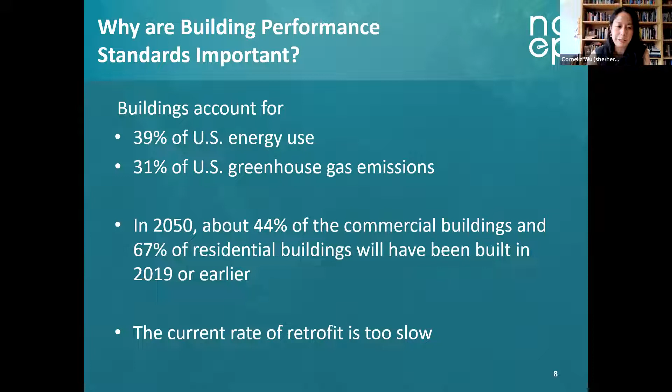Energy codes apply to new buildings and major renovations. They are based on the International Energy Conservation Code and/or ANSI/ASHRAE IES 90.1. Energy codes are one of many building codes, such as fire codes, structural codes, plumbing, and electrical codes.

Energy codes are set by each state, and while typically based on the International Energy Conservation Code, the model code year can vary. There are three major components: lighting, HVAC or mechanical, and envelope.

In contrast, building performance standards are relatively new and they apply to existing buildings, usually those that exceed a certain square footage. They are policies that require building owners to meet city or state mandated targets by improving the performance of their building, which can include energy use, water use, and emissions within the timeline specified, usually a series of milestones that need to be met over the years.

For instance, a compliance cycle might be every 5 years. Many buildings, as you know, combust fossil fuels on site for heat and hot water purposes. Building performance standards can encourage better performing buildings without necessarily stipulating the exact path.

Jurisdictions in the US where building performance standard legislation has been enacted include Washington, DC, New York City, Washington State, St. Louis, Missouri, and Reno, Nevada.

Energy codes and building performance standards are often developed independently of each other, and this is the crux of our session today. This is because while the energy code is typically based on the IECC, building performance standards are developed by each jurisdiction based on different interpretations of how benchmarking should be achieved and other variations.

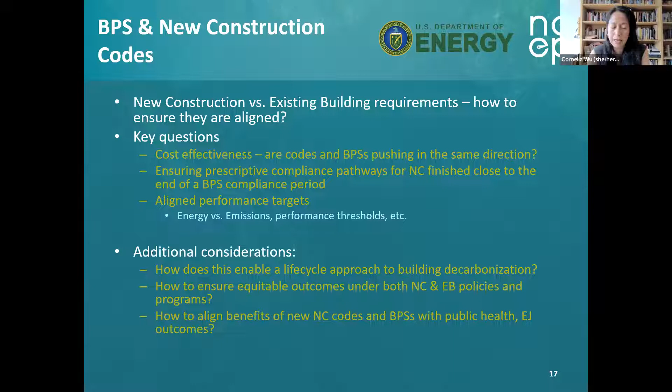Greetings, Cornelia. Thanks. Nice to see everyone. Thank you for joining us. Having us out. We're just so happy to have you here with us, because DC really is at the forefront with building performance standards. Thank you.

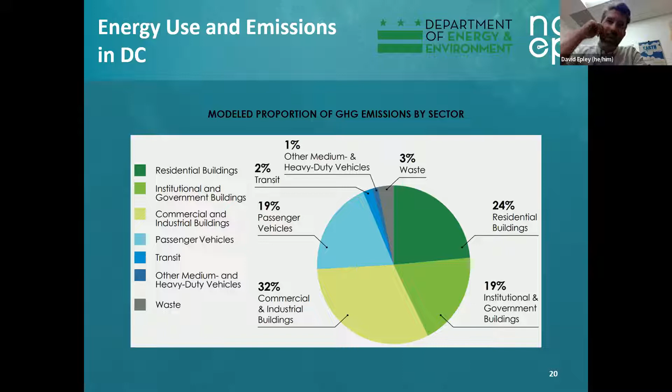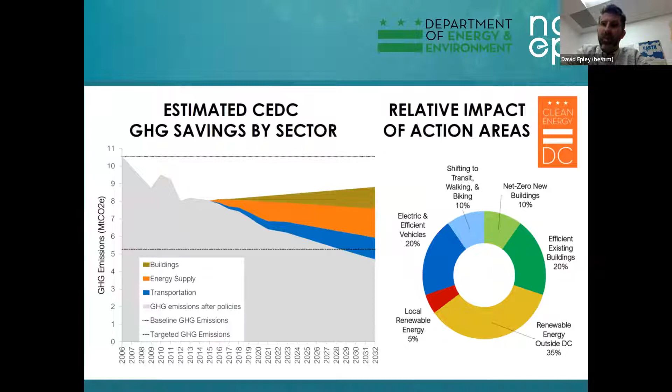And so we take our building energy policies and programs and enforcement very seriously. Next slide. Give a few more graphs here. On the left, you'll see the GHG emissions trajectories, out of our Clean Energy DC plan, which is online, a comprehensive energy plan. The tan, brown, gold color is our buildings, represented on the circular chart by our net zero energy new building strategy, and then our existing building strategy, which is the building energy performance standards.

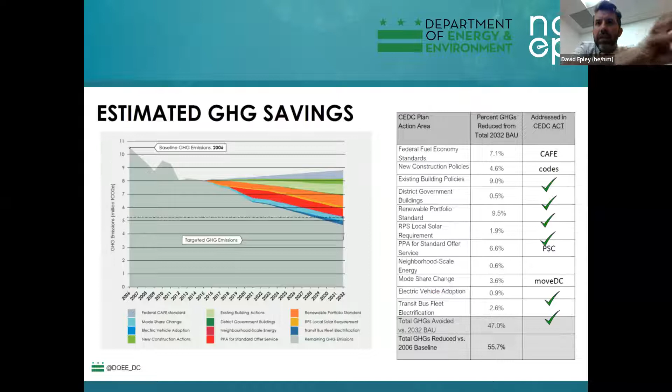Next slide. To break this down further, and by the way I'm sure NEEP will send out these slides so you can dig into these more. This is going out to 2032. As it progresses, the impact of net zero energy codes and energy efficient codes starts to have a bigger impact as we move forward. On the chart on the left, by 2032, it's about 4.6% of our GHG reductions over the 2032 business-as-usual case for new construction policies, i.e. net zero energy codes. And the existing building policies, our BEPS, is 9% at that point.

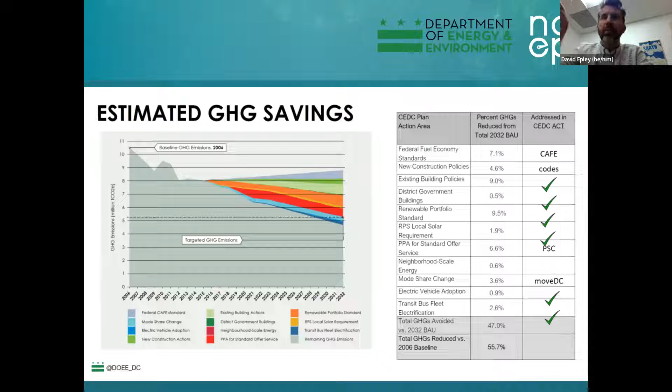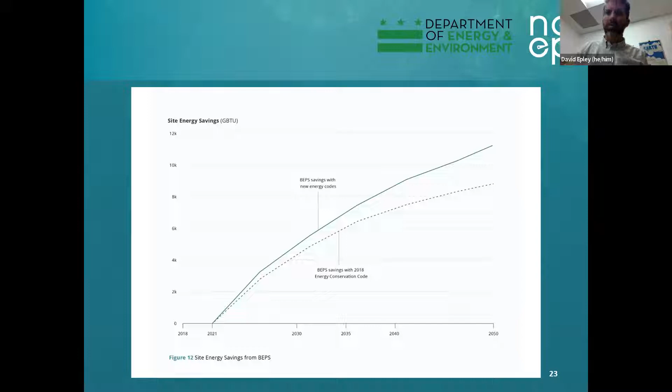But if we move with our net zero energy codes, what happens, and we'll talk about why in a minute, is that it accelerates the impact of BEPS. For each building type, we're setting the building energy performance standards based on the median performance, and buildings that are lower than that have to go up. So if you push up the performance of every new building coming online, it moves the whole pack up and changes the median, and then accelerates and builds off of each other going forward. So it's very important to have both these things, and we would not be able to reach our carbon goals without this BEPS and our net zero energy code. So next slide.

Okay, so here we have BEPS cycles, as I mentioned. The way it works in DC, and I guess in New York too and other places, is that BEPS are set for us. We have a 5-year period, and multiple cycles over time, and as we go up, the energy performance continues to become enhanced. So you complete the first cycle, reshuffle the deck, reset the BEPS standards, and folks below the standards have another 5 years to come above, and it keeps going on. The code starts to accelerate this as you bring on more efficient buildings into the fold and into the deck.

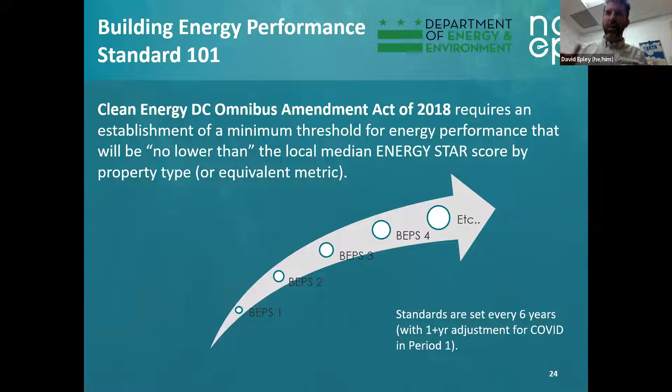Next slide. One thing I'll mention too is over time our BEPS starts to step down, over the cycles I was just pointing out. So right now we're at 50,000 square feet and greater for private buildings. DC-owned, or instrumentality-owned buildings, are at 10,000 square feet. So that covers a lot of ground. In our second cycle, we're going to go down to 25,000 square feet, and in BEPS 3, it's going to be down to 10,000. So this changes over time too. Of course, the codes affect all construction and all buildings.

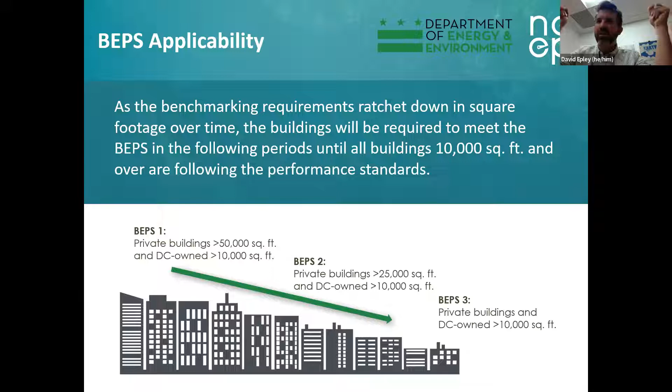Harmonizing these two things, as I mentioned, they accelerate each other. Without them, we wouldn't be able to hit our 2050 goals.

One thing we've been thinking about a lot is interagency coordination on policy and enforcement. How do the policies in zero energy codes, or codes in general, as well as policies like how we invest in affordable housing, supplement the mandatory requirements in a qualified allocation plan? How do those all blend into each other to ensure that buildings coming online and built to the codes are able to comply with BEPS over time?

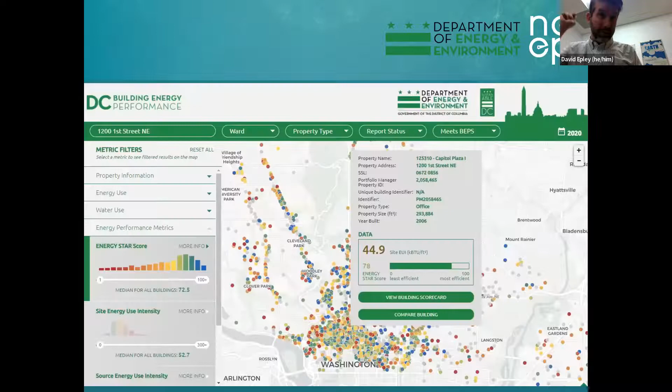There's an affordable housing retrofit accelerator we've stood up with the stimulus funds, the ARPA stimulus funds. That's really interesting and something worth checking out. Next slide.

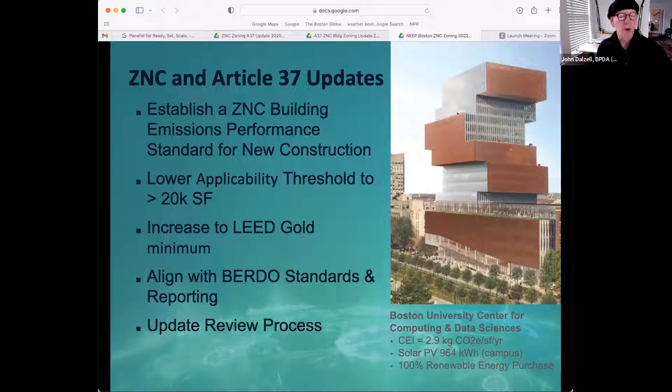As background, we have long had a green building standard. It's Article 37. Our current policy has set in motion a requirement that we update that zoning to include a zero net carbon building standard and lower our applicability threshold to 20,000 square feet, but also include updates to other aspects. It is a LEED-based standard, so we're elevating the minimum requirement to LEED Gold.

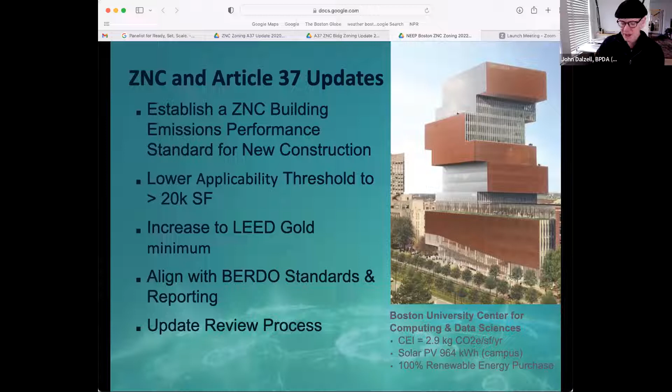Very importantly, we're aligning our BERDO standard and our zoning standards so that they interact and work with each other. This picks up on the point that a new building becomes an existing building the day it opens up. And then there are corresponding updates to our review processes.

What's great in Boston is that we already have an excellent industry at work creating high performance buildings. So we're really quite fortunate. We have some of the best engineers in the country, some of the best architects, but also some of the best developers. They've really taken to heart the city's carbon neutral 2050 goals and are already delivering buildings.

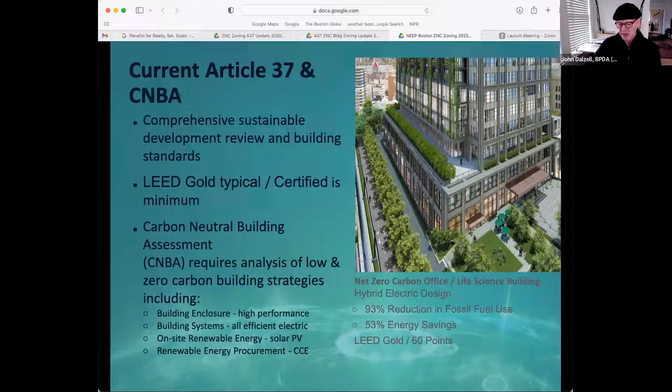Our approach here is to remain comprehensive in our sustainability strategies, but to add the zero net carbon aspects to it. So the framework we're establishing looks at low carbon buildings, making sure the building that gets built is still prioritizing on-site carbon reduction.

We also want to make sure buildings include on-site renewable energy, so we're talking about introducing a mandatory renewable energy standard for buildings, and then that they have a strategy for procuring renewable energies sufficient to offset the remainder of the carbon emissions from the buildings.

What was interesting in our process here was the introduction of embodied carbon and recognizing how important it is for our carbon neutral goals to also begin work on reducing embodied carbon. So more on that point to come.

Because this is city-sponsored development, it also includes a significant amount of affordable housing. LEED Platinum is part of it as well.

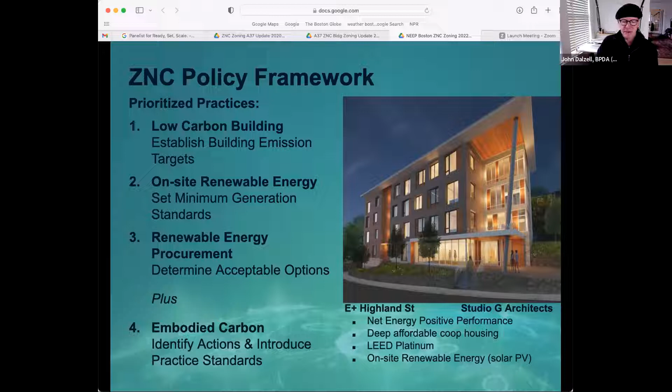BU, I showed this building earlier, but this building exemplifies our performance framework, our policy framework. First of all, it's starting out as a really good building. It's got a very low energy use intensity of 39.

We are, however, working on carbon emission reduction. So all of our policy is built around carbon emission intensity, and in this case, it's a really impressive figure of 2.9 kilograms per year.

BU is adding solar renewable energy to their campus buildings, but they already have in place renewable energy procurement policies and already purchase 100% of their electricity from renewable energy resources. So this is a net zero carbon building that is already topped out in steel and well on its way to being enclosed. Once again, very fortunate to have these anchor institutions showing us that zero net carbon buildings are possible today.

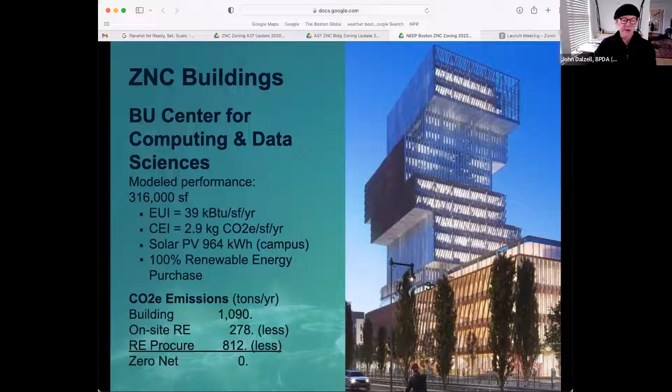The bottom here is just the simple carbon accounting: total emissions, on-site renewable, what's required for renewable procurement. The BU building here, by the way, is 100% electric. There is no fossil fuel use in the building.

We're seeing this across typologies. This is a large multifamily residential development project, actually a redevelopment of an existing affordable housing project. I think we've all heard great concerns about these sorts of policies affecting our affordable housing community, and I can tell you, this group is really at the forefront of practice.

Here we have a building with an EUI below 20, which I think 2 years ago I would have said is outrageous, not possible. Today I can tell you we are typically seeing buildings with EUIs below 20, multifamily residential buildings that is. The comparable carbon emission intensity of 1.48 is exemplary, with on-site renewable to offset as much as they can, and then once again the carbon calculations.

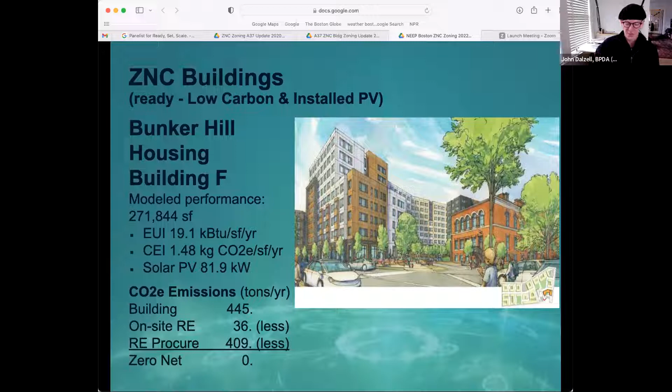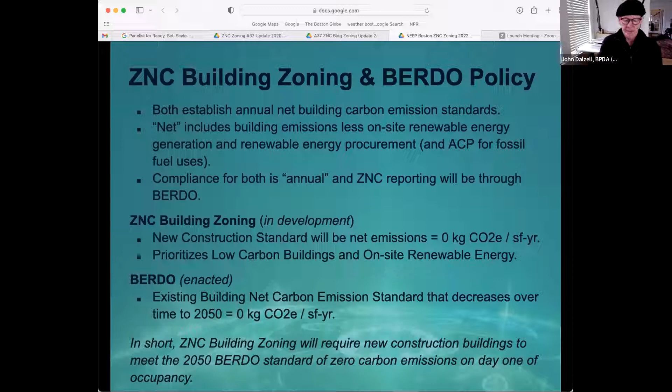This is where our work gets complex because we have these two policies. BERDO 2.0 is brand new, and the zero net carbon building zoning policy is being worked out, but they are quite similar. Our zero net carbon standard just sets a day-one zero emissions, and that's all you get for new construction buildings. Our BERDO standard is a declining standard, similar in many regards to DC, and I'll show that table in just a second.

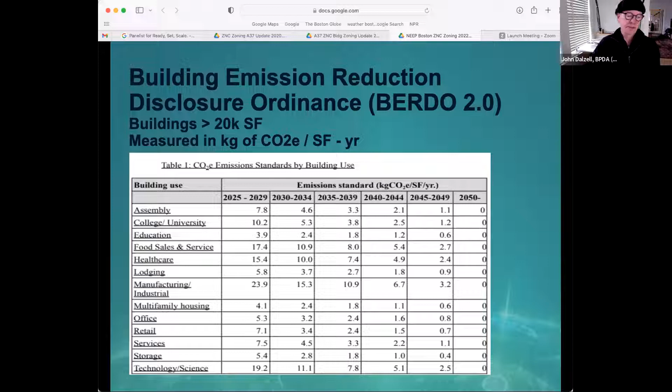So we have different typologies, using the Energy Star portfolio manager typologies, but we've set declining standards based on those different uses. They step down every 5 years, and eventually by 2050, everybody zeroes out to zero emissions.

I want to focus a little bit on the zero net carbon building zoning here, and in particular the Low Carbon Buildings TAG, because this is where a lot of the work is, and it's really where we also place a lot of our priorities. We want to make sure that our new buildings are emitting as little carbon as possible.

What we've been able to glean from practices in Boston is that there are really two approaches that make a lot of sense. One is a percentile reduction compared to ASHRAE models or the Massachusetts Building Code, and the second is to establish carbon emission intensity targets.

This is where our BERDO standard and our zero net carbon standards start to align in some regards, but also create confusion. For our zero net carbon building standards, we are talking only building emissions. The net zoning requirement is annual, all emissions plus any offsets plus renewable energy procurement.

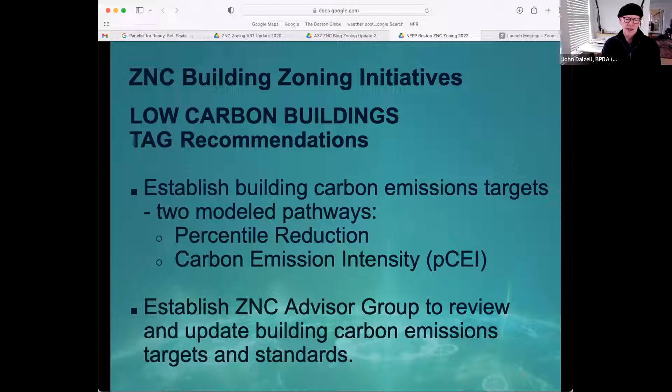But to make sure that the buildings are in fact good buildings, we've introduced this idea of building carbon emission intensity standards. And another recommendation that's going to be really important for all of us is that we continue the conversation. So here, we will establish a zero net carbon advisory group to continue to update building standards and practices. So the two pathways: the first is a percentile reduction.

Both are modeled. Our work and our permitting for new construction is entirely based on modeled performance, so this is fine for us to use a percentile reduction. We do know that some buildings, like a lab office building, will be different from the next one. It might not be able to achieve a carbon emission intensity target, so it can utilize a percentile reduction target. We also know that hospitals and energy-intensive or use-intensive care facilities, we're not going to see them get to a 40% reduction, so we've allowed a 30% reduction for that typology.

We also know small residential buildings use HERS modeling, and so we have corresponding standards there. We also know Passive House as an overall approach does a great job of delivering low carbon buildings, so we're looking at how to utilize that as a pathway for demonstrating good practices.

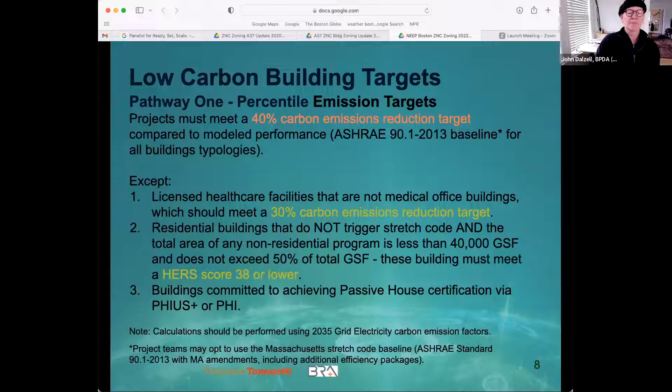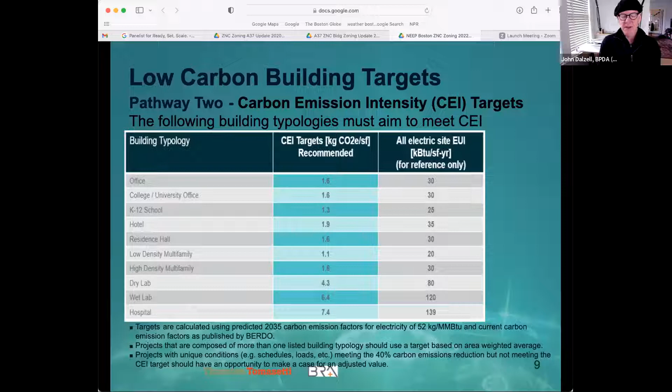This is what we know a good building should look like, but we also know buildings are very unique, whether it's their massing, their use, their orientation, or other aspects of that particular project. So we're going to go forward with targets that tell us it's a good effort on the building planning side, and then make sure that the remainder of the strategy isn't overly used—that remainder being on-site renewable energy and renewable energy procurement.

This just speaks to what we saw in practice when we analyzed recent projects. It shows us that many building typologies are already exceeding a 40% reduction. Going back to things like carbon emission intensity, we really feel like residential multifamily buildings are getting towards 60% reduction in carbon emissions. So we want to recognize that different typologies have different potentiality.

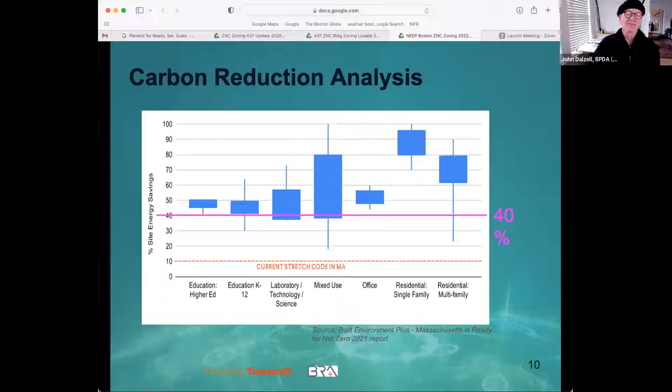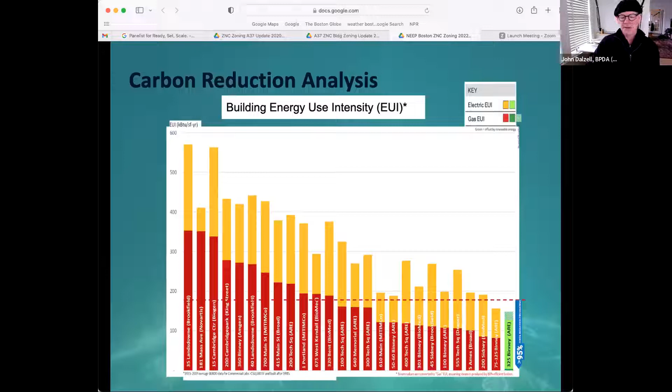We looked at buildings over time too, and again saw that these practices were progressing, and we felt we could, in fact, enact these kinds of targets. Most importantly, we wanted to look at the cost issue, which is the big concern for everybody—that we're going to be driving up the cost of construction. I can tell you for sure that we are seeing these buildings coming in on budget, or very close within budget, and that's without considering things like incentives or the net present value of a building that has a very low energy cost quality to it. So I'll stop there and look forward to our conversation in the question and answer period.